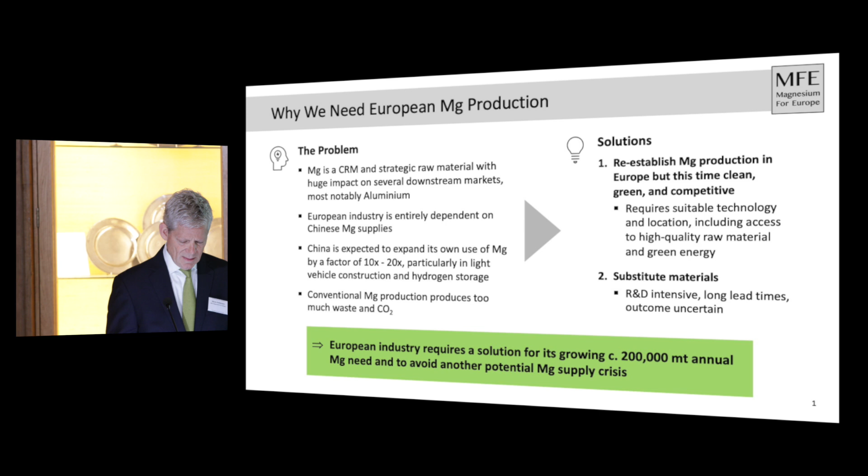The second one, the problem is the scientists that I've spoken to at the various end users of magnesium, they say they try substitute materials every 2 years, and they just can't find anything that has similar characteristics or is of comparable cost. So we need a solution here in Europe, and the one that we are pursuing is the reintroduction of magnesium production to Europe, but in a cleaner, greener, and competitive manner than what we currently have in China and what we used to have here in Europe 20, 30 years ago.

Our mission was motivated primarily by an investment that I made together with about 15 other individuals in a dolomite mining company in Bosnia and Herzegovina. And we found that the material was of incredibly high quality. We had it analyzed for magnesium production a few years ago. And then this combined with the magnesium crisis sort of spurred us into action. And that's when we established MFE.

The other factor that really convinced us to pursue this is the progress in Mg production technology. Because over the last 10 years, there's been a lot happening, and I'll show you now what.

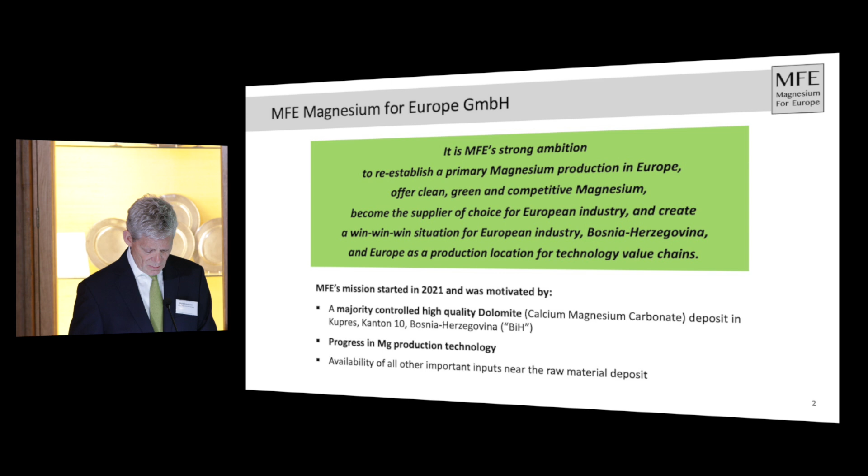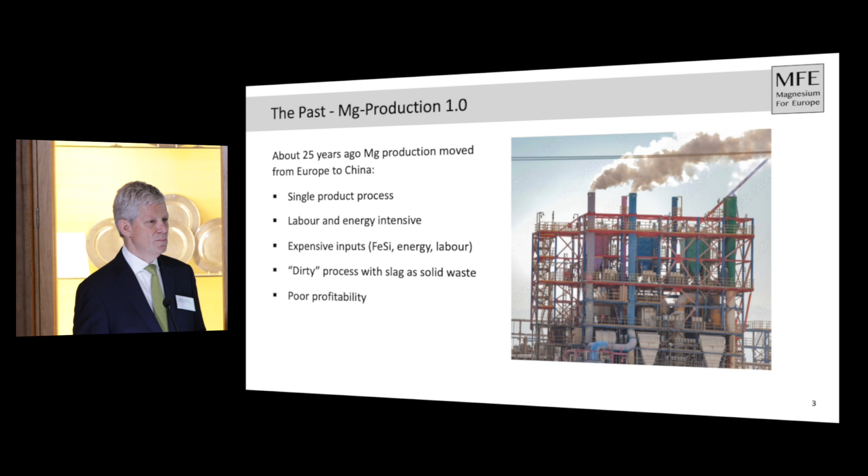So, the past was looking fairly grim, and I call it Mg production 1.0, because 25 years ago, we had magnesium production here in Europe, but it was very energy intensive. It was a single product process. It involved expensive inputs. It was fairly dirty, with a lot of slag as solid waste, and overall had poor profitability. So we let the whole industry migrate to China. And that is the reason why, because the Chinese, they used the Pidgeon process.

And this being a very electricity or energy intensive process, they had cheap energy, they had relatively inexpensive labor, they had the raw material, which is fairly common. Dolomite is a fairly common material, but you rarely find really high quality dolomite, and that of course helps the economics and the process.

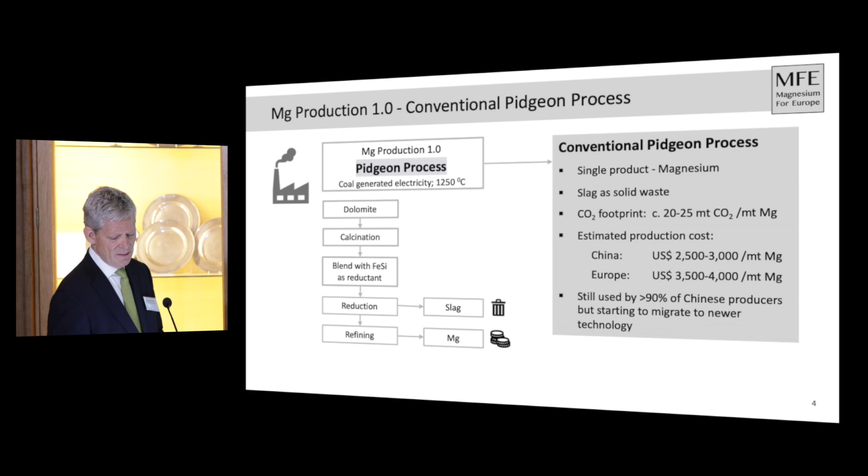And in this process, as you can see down there, you get slag and you get only one product. So the estimated production cost, and that's an estimate from CM Group, who are the sort of leading researcher in the magnesium space, is $2,500 to $3,000 a ton for China, and in Europe it's slightly higher because of more expensive labor, more expensive energy, and therefore at the current magnesium price of about $2,500 a ton, it wouldn't be very viable to bring magnesium production back to Europe.

So the question really is, why are we bothering? Why is MFE doing this? And there are two catalysts. One is technological progress, and the other one is the location and the quality of the raw material. The technological progress allows these days for a multi-product process with zero waste and very little CO2 emission.

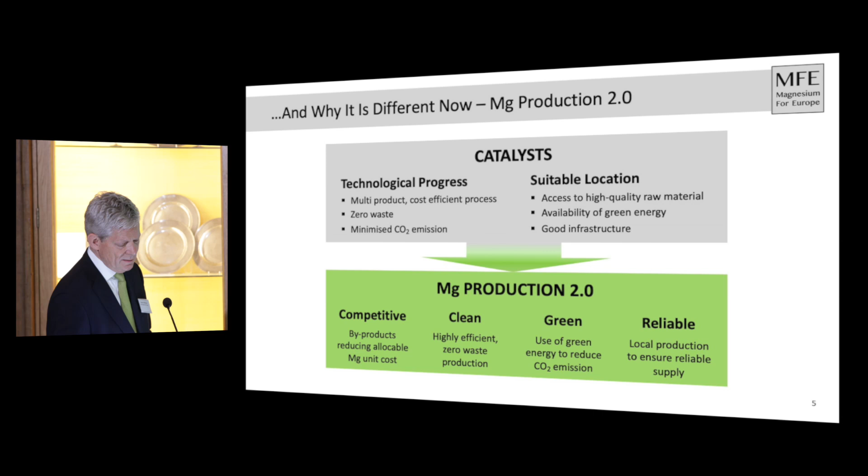And the right location on the edges of the EU allows for relatively inexpensive energy, green energy, still good infrastructure, and we have the benefit of high quality raw material there in Bosnia and Herzegovina. So that makes for a clean, green, competitive and reliable process.

Here's the process that we are going to use. It's called the Al-thermic process. And the process is quite similar to what we've seen before, the Pidgeon process, but it has three important differences. One is it's run at a slightly lower temperature. It involves one more process step, which is the calcium-magnesium separation. And the third one is it's using aluminum scrap instead of ferrosilicon as a reductant.

Now these three relatively small differences make for a very powerful impact. Instead of one product, you suddenly have four sellable products. You have the magnesium after the refining at the bottom. You have dry ice at the top, which is the excess CO2 that you don't reuse in the process. You can siphon that off, and fortunately, where we are, there's a big market for dry ice for the fresh food industry.

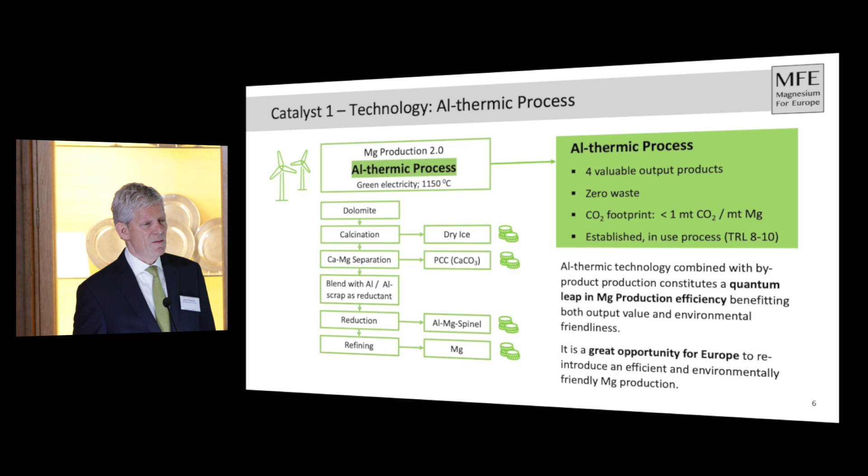And the good news is the Al-thermic process is an established process with a TRL level of 8 to 10. So it's a quantum leap, in our view, in magnesium production efficiency. And it's a great opportunity for Europe to reintroduce an efficient and environmentally friendly magnesium production.

So before we get to the economics, let me say a few words about the Al-thermic process. The process is originally a process developed by Alcoa in the 1960s, 70s. But as I said earlier, we sort of stopped magnesium production here in Europe. The Chinese used the Pidgeon process because they had plenty of cheap energy.

But more recently, they've also become more environmentally conscious, and therefore they revisited some of the prior processes, and they have further developed and perfected the Al-thermic process. And they have 4 active plants in China, and that's why we ran our industrial test on one of these plants in China, together with our technology partner LGE, which is part of Chalco, the national aluminum conglomerate. We had this test audited by DMT TÜV Nord, which is the German testing, inspection, and certification company.

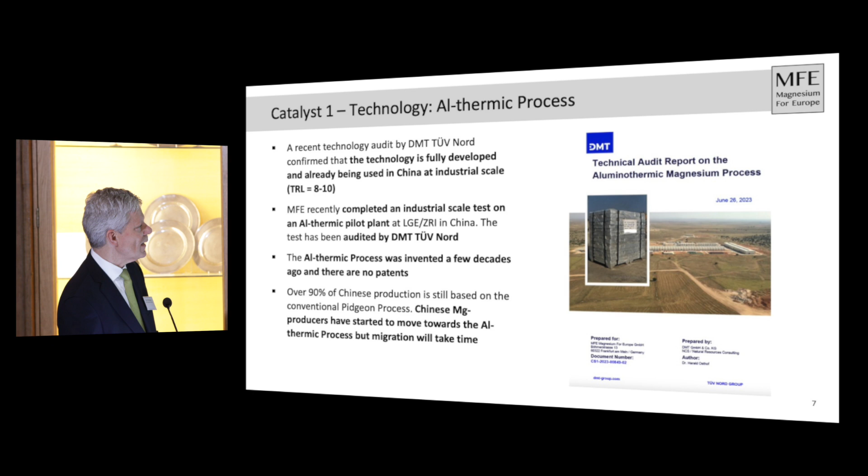And we have now a test report which details exactly the quality of the products that we can achieve with our dolomite from Bosnia-Herzegovina, and also the exact plant configuration that we require. But before we get to the economics, let's take a look at the second catalyst, because that's also quite important.

We could also ramp this plant up to 30 or even 50,000 tons per annum capacity, because in the vicinity there's enough green energy for that. The site that we own of 80,000 square meters is sufficiently large for that. And the infrastructure would also support that, because we're just 150 kilometers away from the Croatian port of Ploče, which is the gateway for shipping goods into and from the Balkans.

And we're very close to the EU, and for those of you who follow EU news, the EU opened accession talks with Bosnia-Herzegovina in March, and it's typically 2 to 3 years until such countries become full EU members.

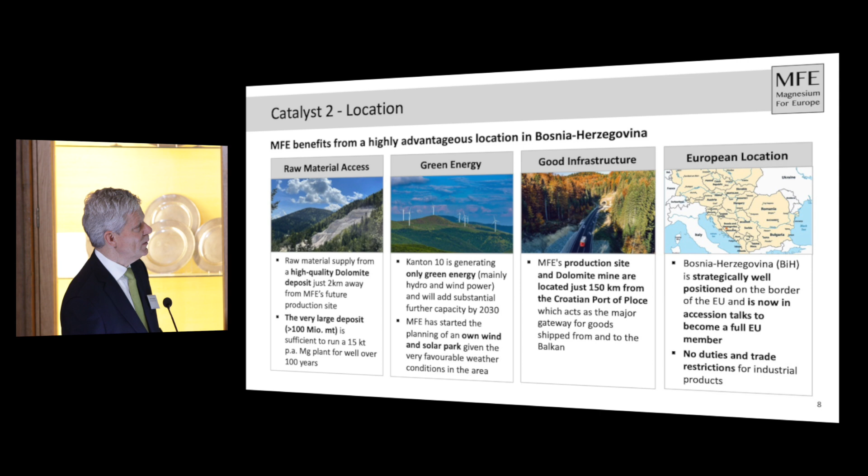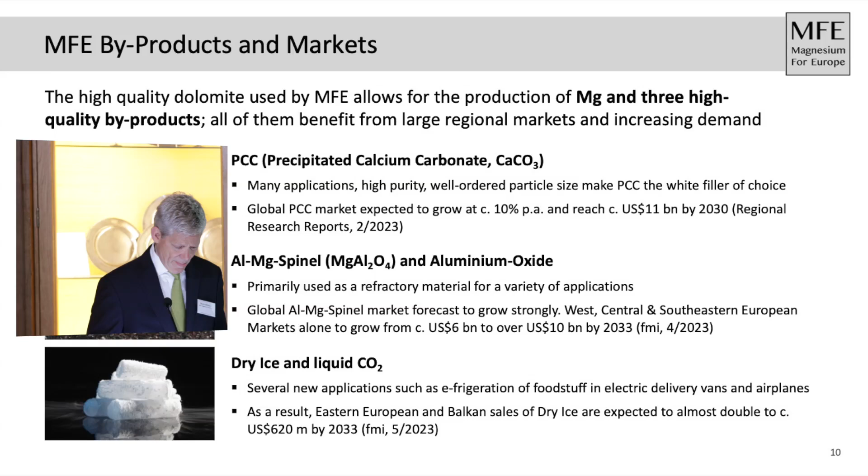So, as you can imagine, the three byproducts have been very much our focus, given their sales value contribution. And what I can say in summary is that they all have growing markets. They have very large markets. And I think if we went to 50,000 tons plus, we may find that we're a relatively large player in some of these byproducts. But until then, there's more demand than supply in these markets.

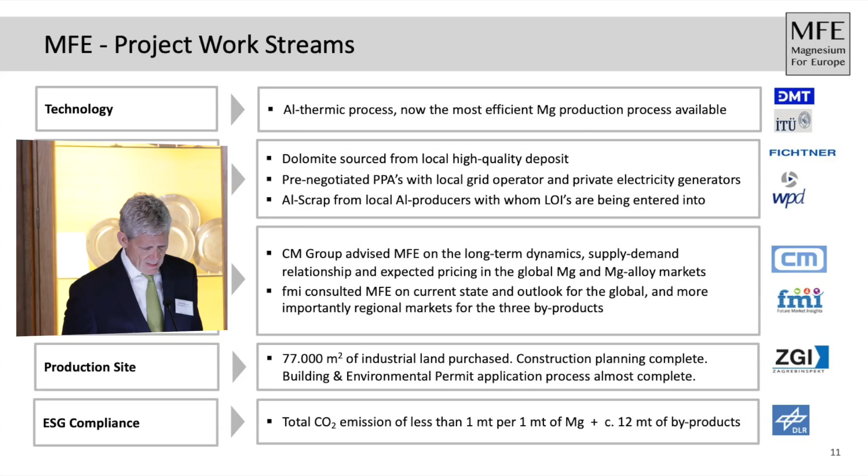These are some of the firms that we worked with. As you can see, on the technology, we've been supported by DMT, which is the TÜV Nord I mentioned earlier. But we also worked with the ITU, which is the Technical University of Istanbul, on validating all of the results that we got from the tests with our Chinese technology partners.

On the supply chains, we worked with Fichtner Engineering, who are planning our wind park and do all the energy calculations. On the products and markets, we worked with CM Group and FMI. Locally, our whole planning and plant design has been done by ZGI. And we signed an LOI with ATILLA, which is a Turkish engineering firm. They built the only European magnesium plant in Turkey for Esan, and operated it also.

And they also volunteered to operate our plant. But we'll have to see. There's a good chance we'll team up with a large strategic who will have an interest in sort of cooperating or operating it solely. And we've done the LCA study with DLR in Stuttgart. They are the leading LCA provider for magnesium production.

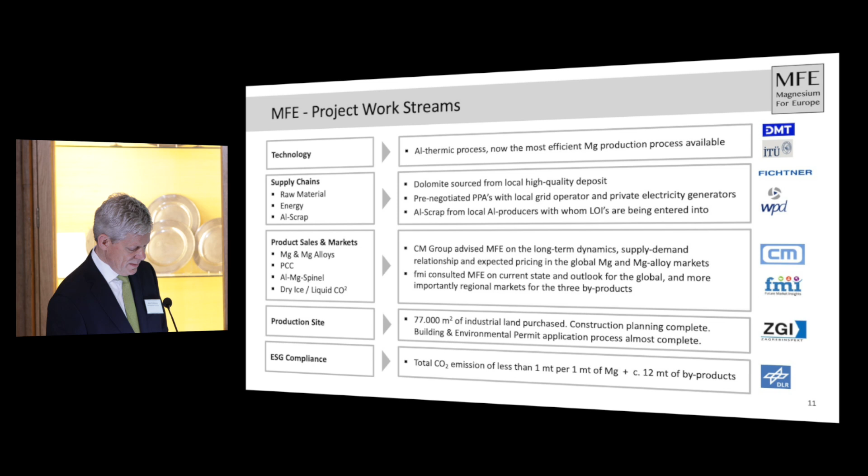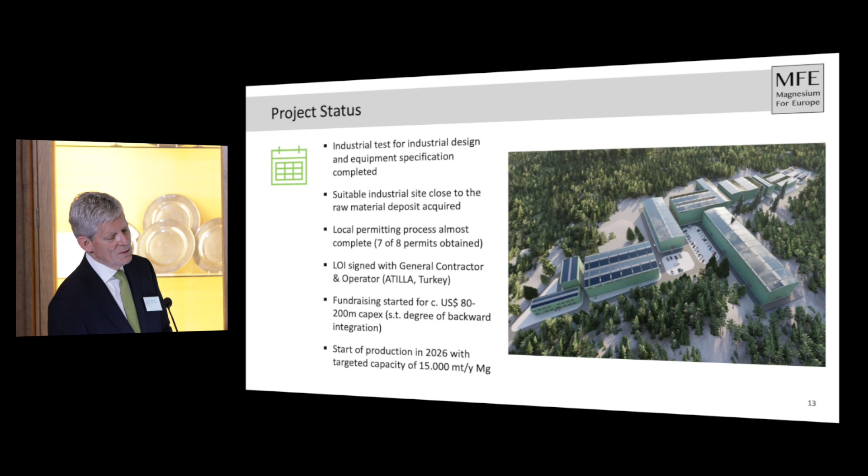Some investment highlights. As I said, we're almost ready to build, just 2 or 3 months away from that. We have more recently asked one of the top 4 auditing firms plus a technical consultant to conduct a full independent report on the project. That's something we need when we make use of government-sponsored loans, for example, or even equity out of one of the raw material funds. For example, the German raw material fund is now becoming live at the end of this month, and we'll certainly file an application there.

We have very strong underlying markets. We had so many inquiries for offtake agreements, I couldn't really deal with them, and then we sort of stopped discussions for now. But the fact is, everybody who's using magnesium is desperately looking to diversify their supply, because right now they can only buy in China. Given the CRM nature of magnesium, we get strong support from European politics out of Brussels. And as you spotted earlier, the great cost-income relationship makes for very attractive financial returns.